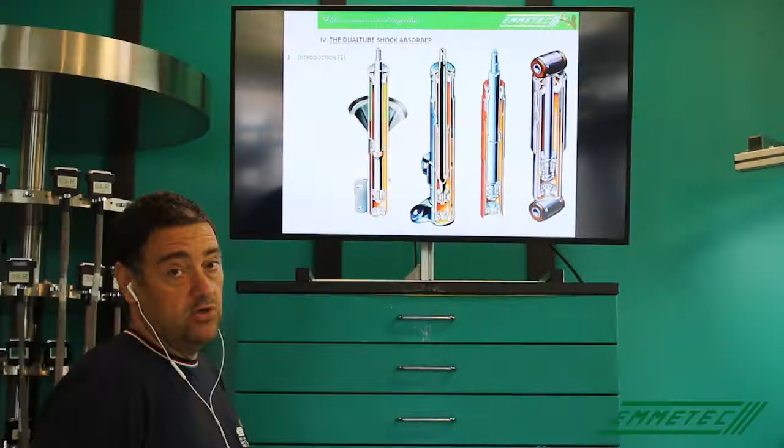The twin tube shock absorber is a shock absorber made with two coaxial tubes. It doesn't matter if it is a standard McPherson with standard stirrups, or a McPherson with non-conventional stirrups, or if it is a cartridge, or a conventional shock absorber. All of them are twin tube shock absorbers, because they are made with two tubes.

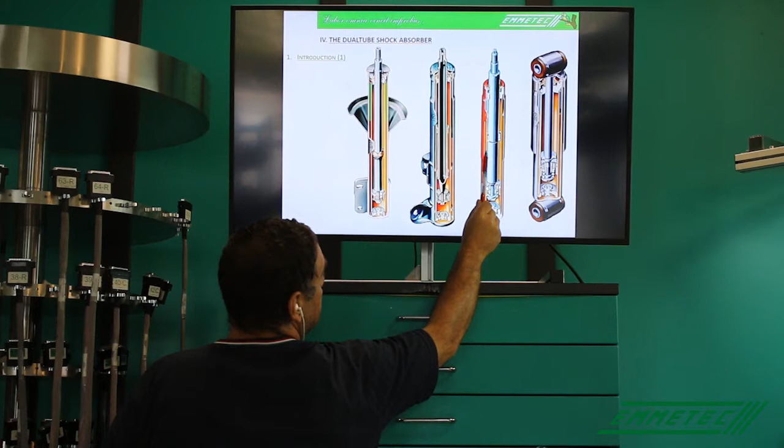The external tube we will call the body, this, or this, or this, or this. The internal tube we will call the cylinder, this - it's very thin, it's difficult to appreciate it - and this. Then we have the rod, okay?

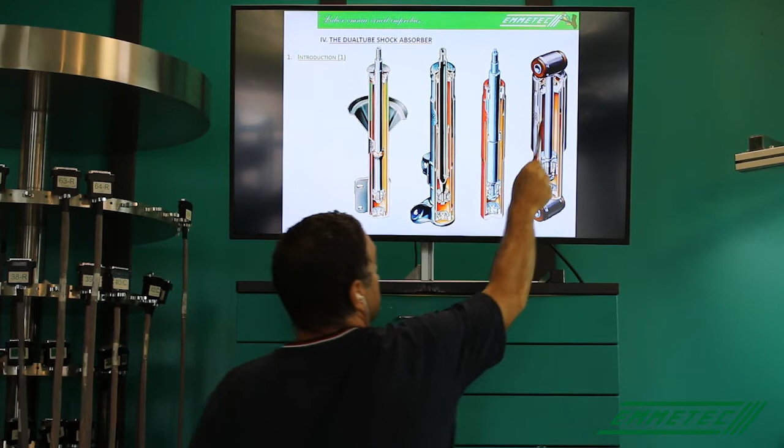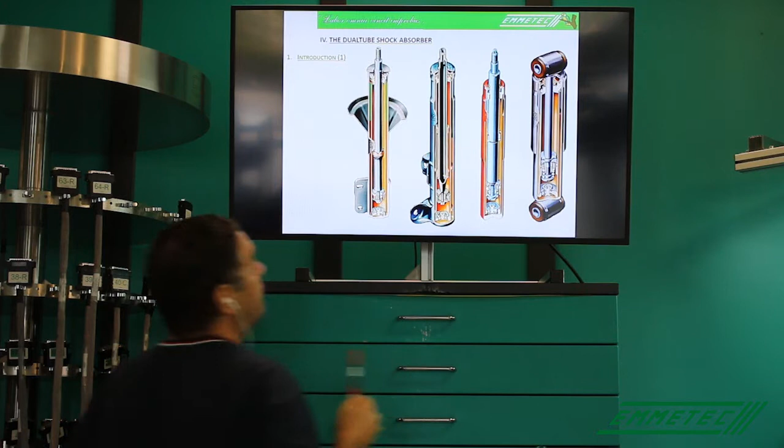This is a hollow or empty rod, the rod, the piston, including one valve. Then there is the guide. The function of the guide is to guide the rod along the cylinder, and to guide the cylinder along the body.

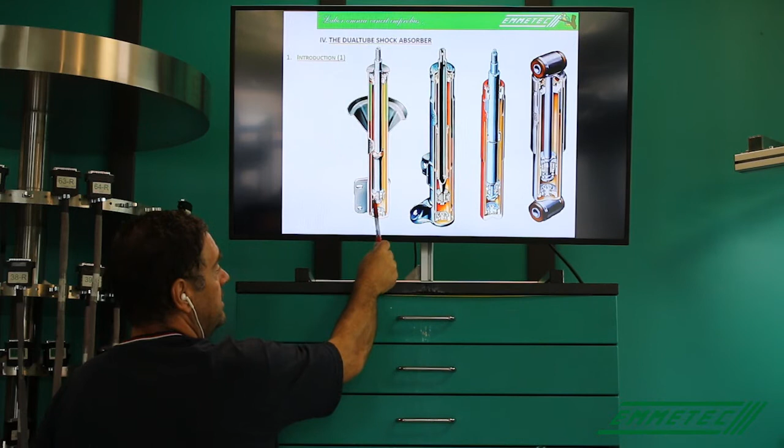Then there is the bottom valve. The bottom valve is another valve that connects the cylinder with the body. In all of them, we have oil and gas. The gas could be nitrogen or air, it doesn't matter. And the pressure of the gas could be 1 bar, the standard pressure, or more.

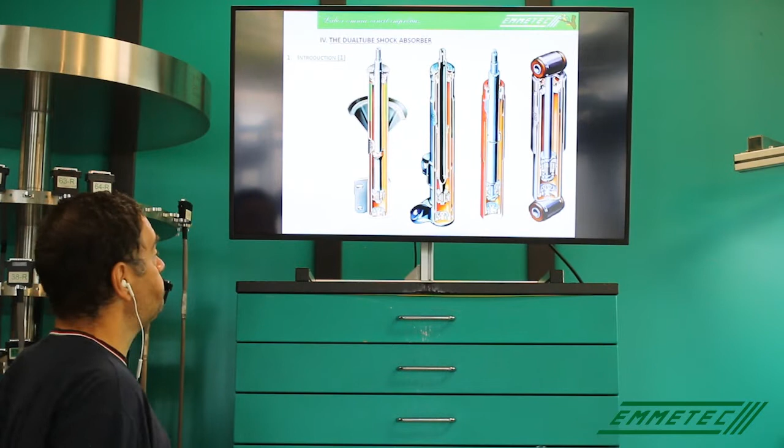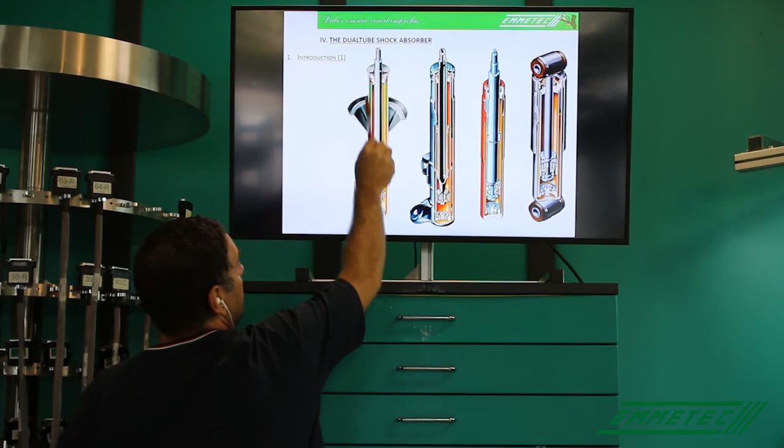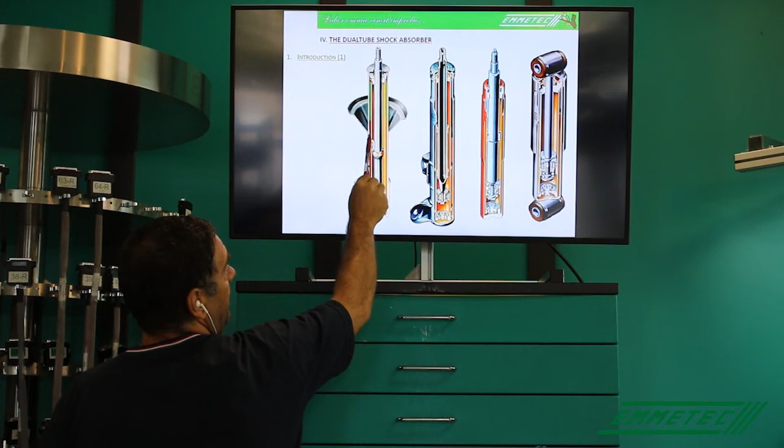In the proper and right conditions, the inner cylinder must be completely full of oil, above and under the piston, always full of oil. The chamber around the cylinder, into the body, must be full of oil to 50% or 3/4 of the body, with the rod in. I repeat, with the rod in, the outer cylinder must be full within half or 3/4 of the cylinder.

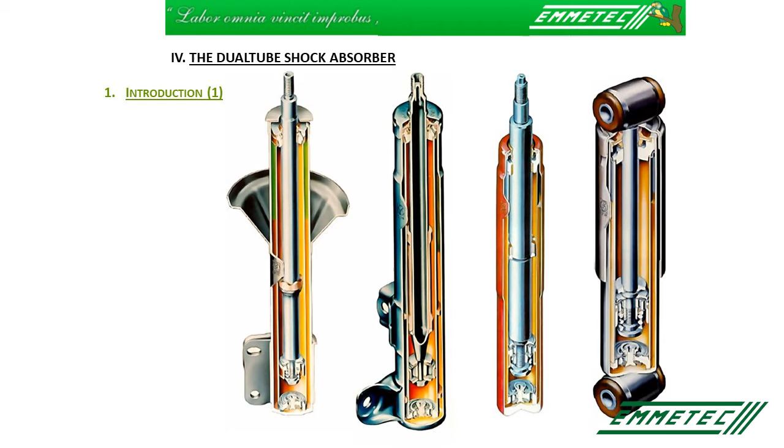It depends on how big the rod is in comparison with the diameter of the cylinder, but this is a detail we will see later with practice. So, how does a dual tube shock absorber work?

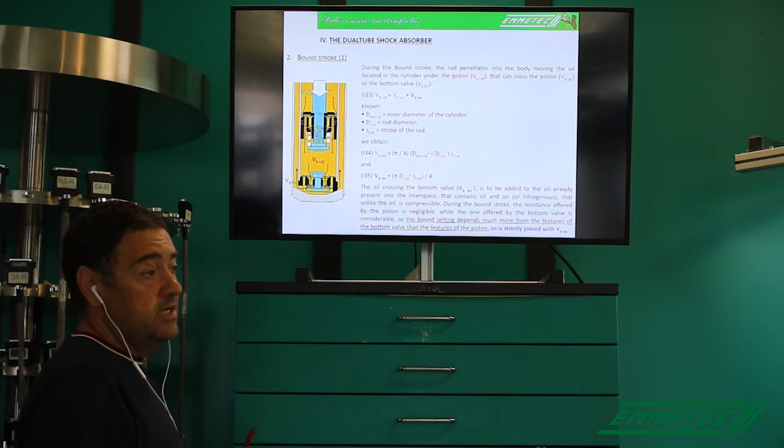Again, it's better to see in detail how the piston is made. It is very similar to a monotube piston, so we will have some holes. Holes are closed by shims. Shims could be preloaded because of the shape of the piston, or because of additional springs.

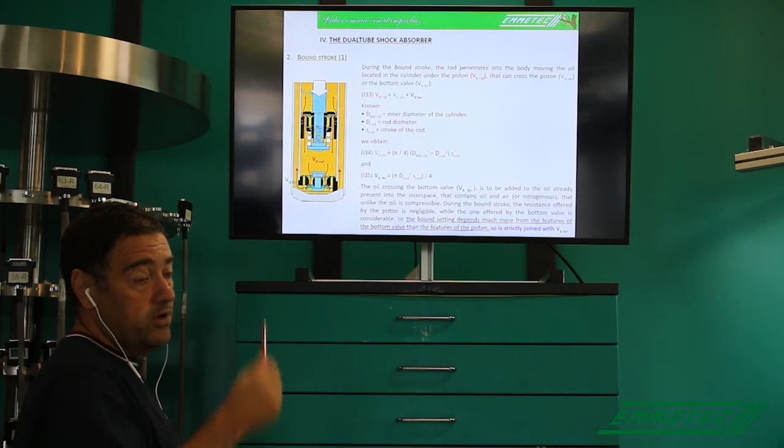Then the bottom valve is similar to the piston, so we will find certain holes working in rebound and compression, and these holes are closed with shims that could be preloaded. In both cases, we have bypass, shims, etc. Let's see how it works.

Suppose I press the rod in, so we are working in compression. I create a pressure in this area, and a vacuum - so a pressure between the piston and the bottom valve, and a vacuum between the piston and the guide. Because of the difference of pressure, the oil is forced to cross the piston and to cross the bottom valve.

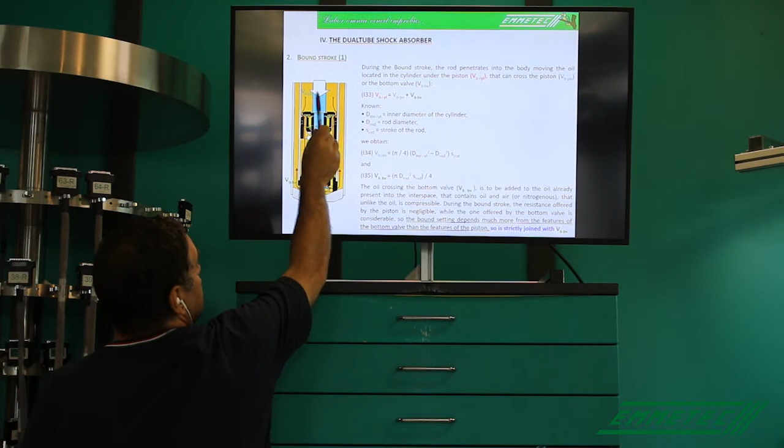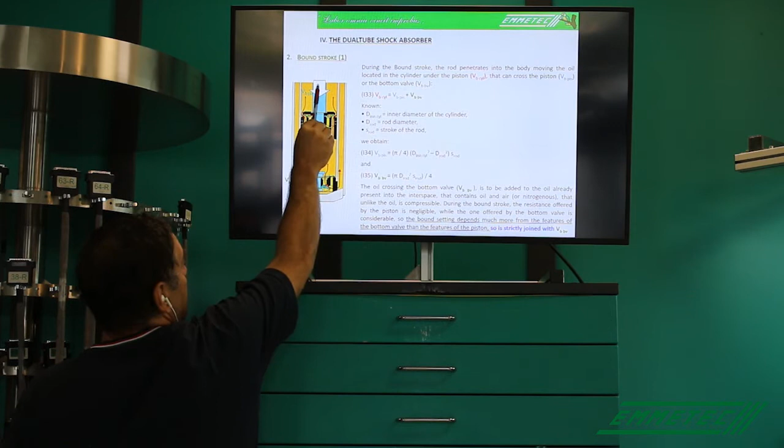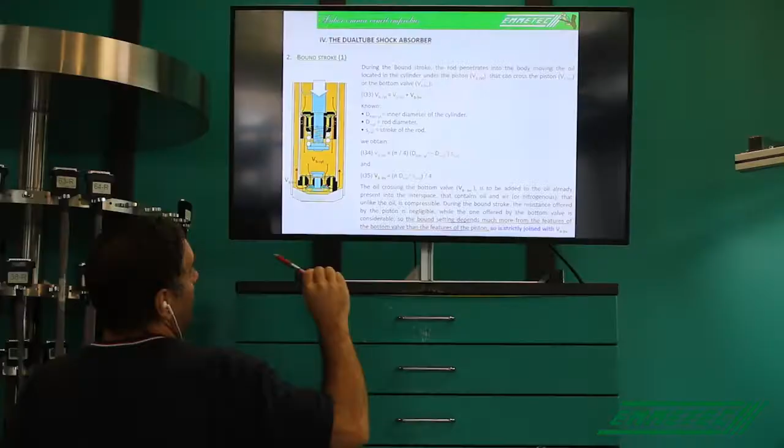As you can see, this volume is higher than this volume, because in this volume the rod is also included. So what happens is that an amount of oil equivalent to the volume of the rod that goes in crosses the bottom valve going into the chamber, while a volume of oil equivalent to this volume less the volume of the rod crosses the piston, okay?

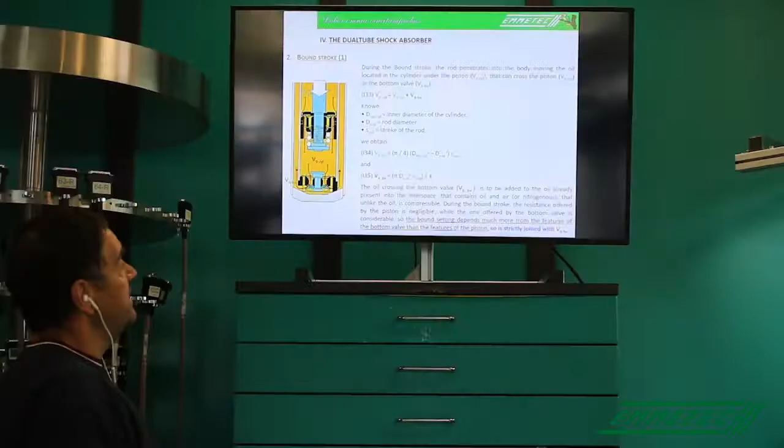The piston is crossed by oil in compression, as well as the bottom valve. So both are working in compression.

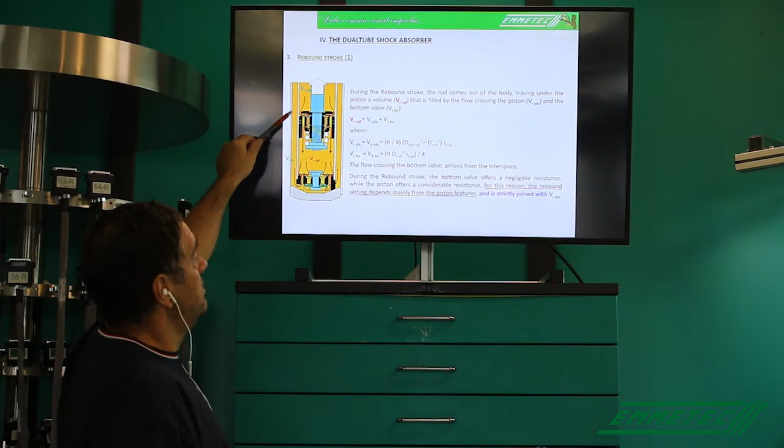During the rebound, I'm pulling out the rod, so I create a pressure between the guide and the piston, and a vacuum between the piston and the bottom valve. Because there is a difference of pressure, the oil is obliged to cross the piston and come here. For the same reason, the oil that is in the chamber crosses the bottom valve, coming here too.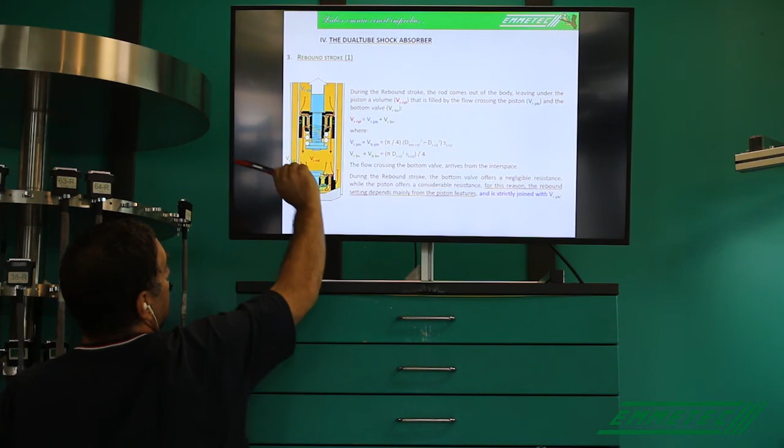So we can say that when the rod is pulled out, a volume of oil equivalent to the volume of the rod that left the shock absorber comes from the chamber, crosses the bottom valve, and comes here, while a volume equivalent to this volume - a volume of oil equivalent to this volume less the rod - is passing from the top to the bottom through the piston. So again, we see that the piston and bottom valve are working also in rebound.

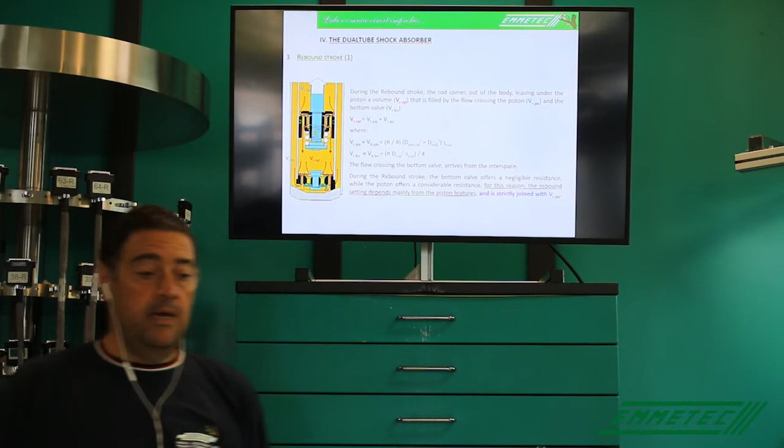Now, at this point, we have to tell the main rule, the golden rule of dual tube shock absorbers.

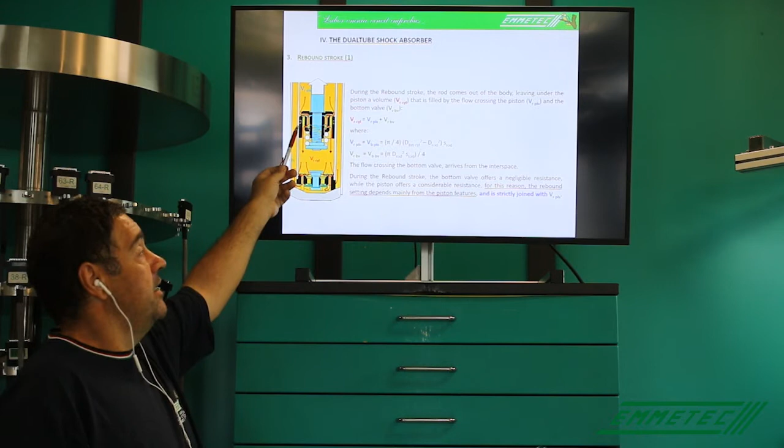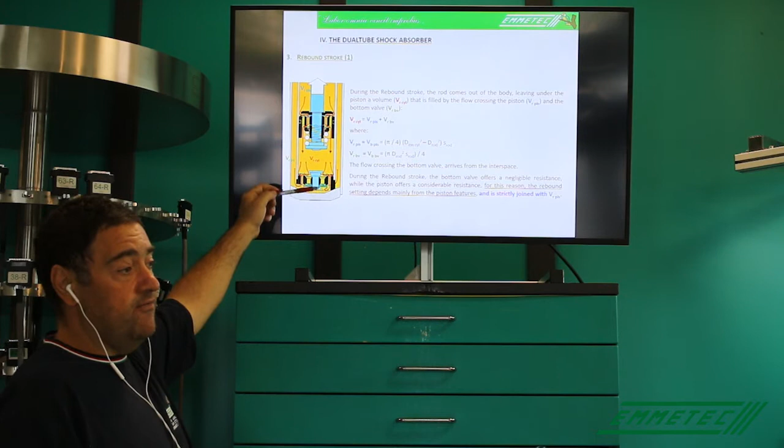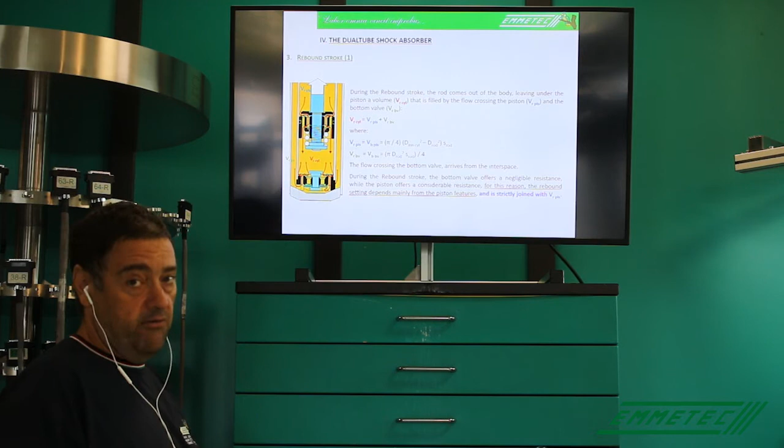The golden rule of twin tube shock absorbers is that the damping force of the piston in compression must always be lower than the damping force of the bottom valve in compression. I repeat it in the simplest way: in compression, the piston must be softer than the bottom valve. I repeat, the piston in compression must be softer than the bottom valve in compression, or vice versa - the bottom valve in compression must always be harder than the piston in compression. Why?

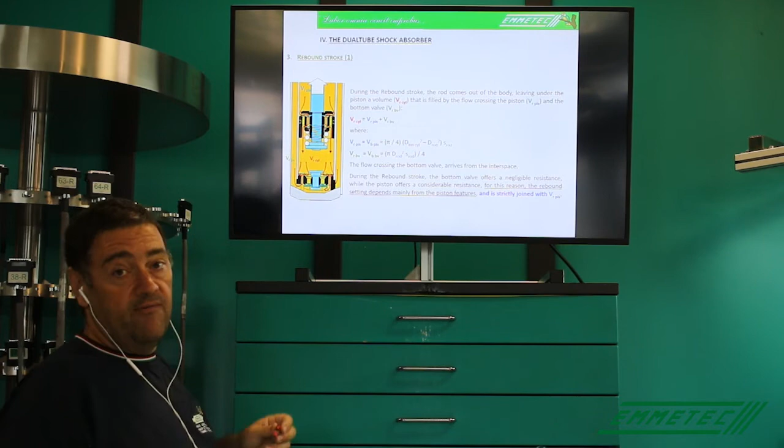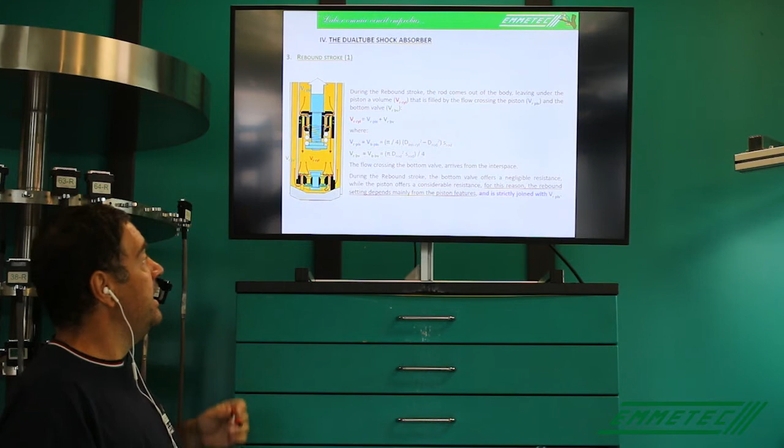Suppose that the shock absorber valves are adjusted to comply with the golden rule: here we have a big bypass and here a small bypass. Suppose that into the piston we have soft shims working in compression, and in the bottom valve hard shims working in compression, so our piston in compression is softer than the bottom valve in compression.

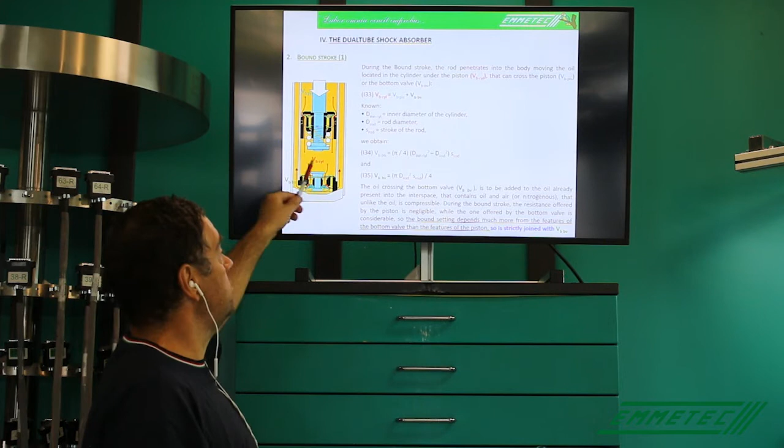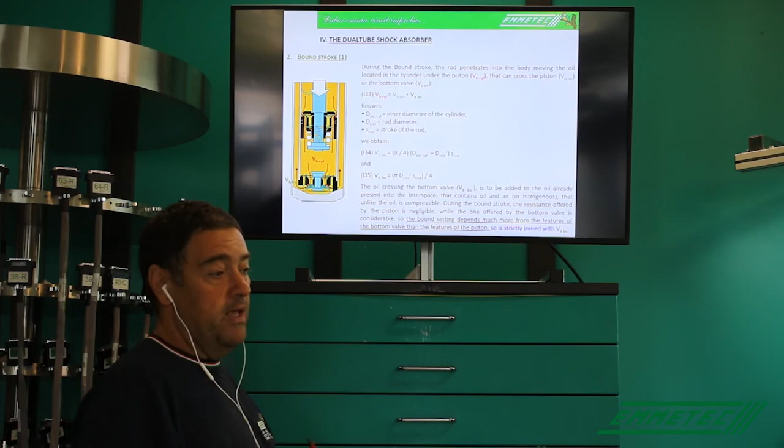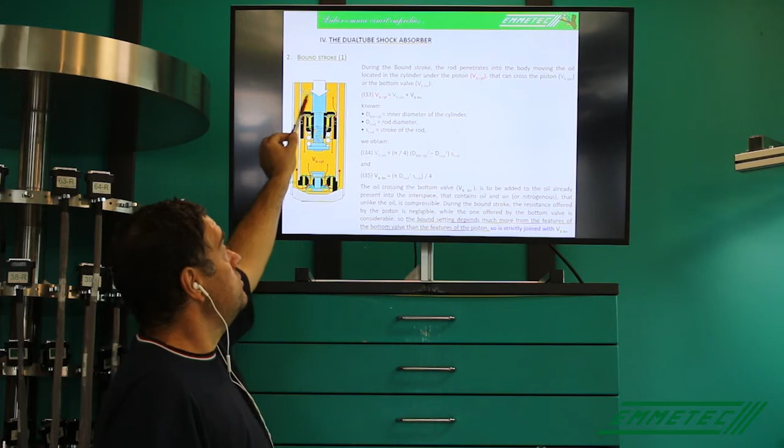Now suppose I push the rod in, so I work in compression. Working in compression, I create a pressure here, a vacuum here, so the oil is obliged to cross the piston and the bottom valve. We have to keep in mind that oil is a little lazy, and is always looking for the easiest way. If the piston is softer than the bottom valve, the oil will cross first the piston. Then once the chamber between the piston and the guide is completely full of oil, the oil will be forced to cross also the bottom valve. In this way, we are sure that the chamber between the piston and the guide is always full of oil.

And this is a big advantage, because in rebound, when we pull the rod out, for sure between the piston and the guide there will be oil — only oil, just oil. So it will work properly in rebound too.

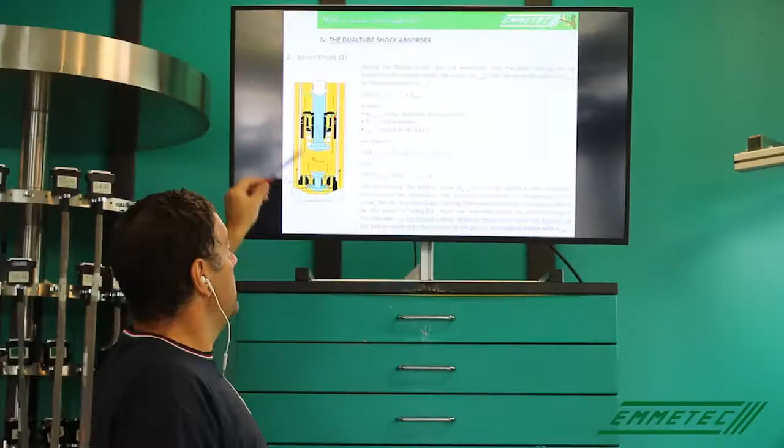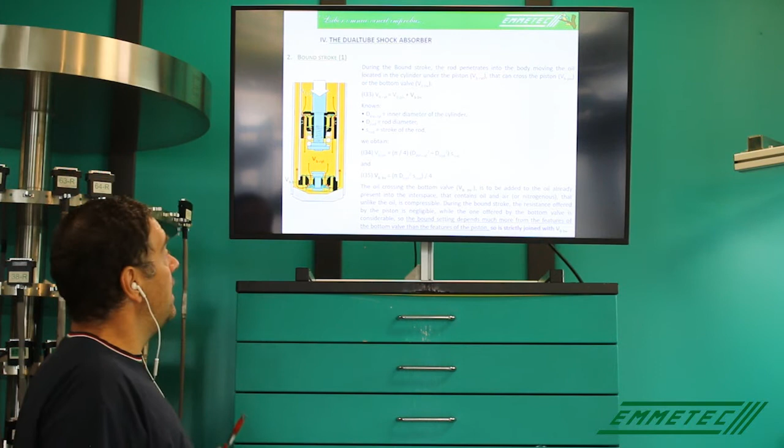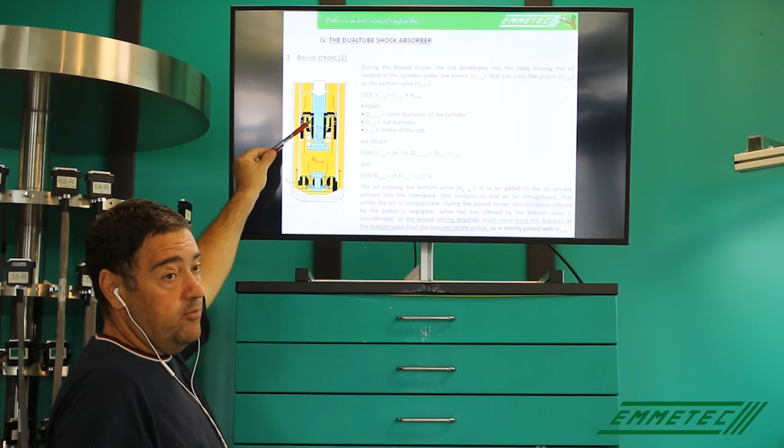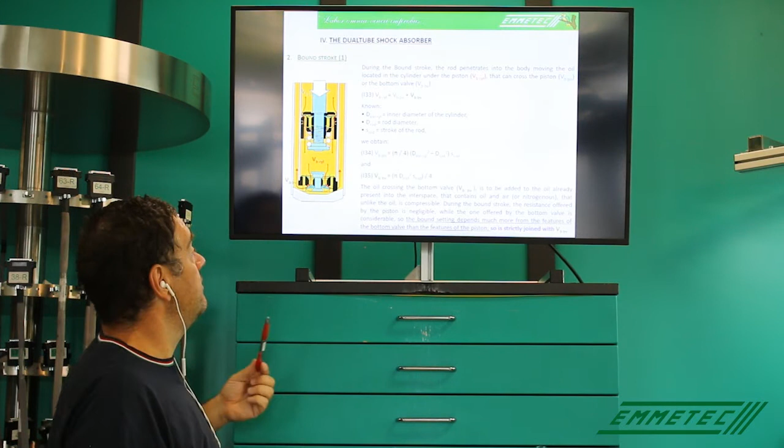Now suppose that for any reason the piston in compression is harder than the bottom valve in compression. What happens? In compression, when I push the rod in, the pressure obliges the oil to pass through the piston and the bottom valve. Remember the oil is lazy, so it will try to pass where it makes less effort. If the piston in compression is harder than the bottom valve in compression, the oil will pass through the bottom valve. Passing through the bottom valve, a vacuum will appear, and the cylinder above the piston will absorb air or gas from the top.

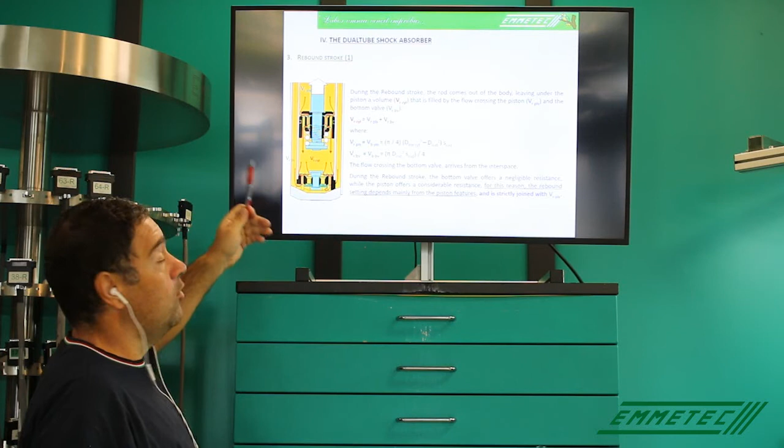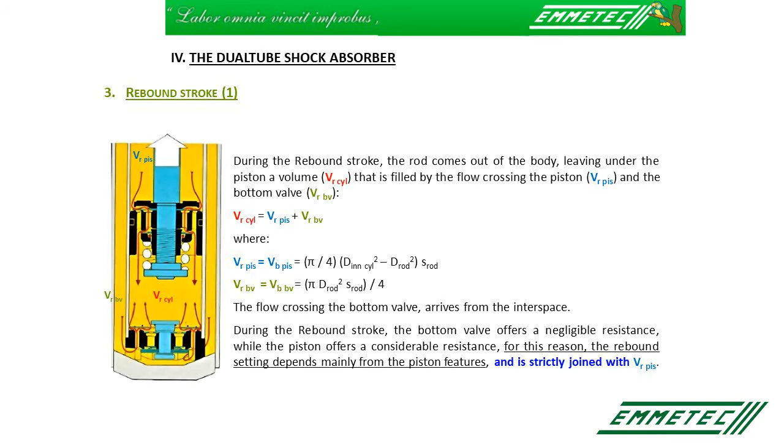It means that later, after the compression, when working in rebound, between the piston and the guide there will be first air, then oil, and the piston will be pulled up, compressing first air and then oil. Air creates no resistance, so we will have a shock absorber that in rebound offers no resistance.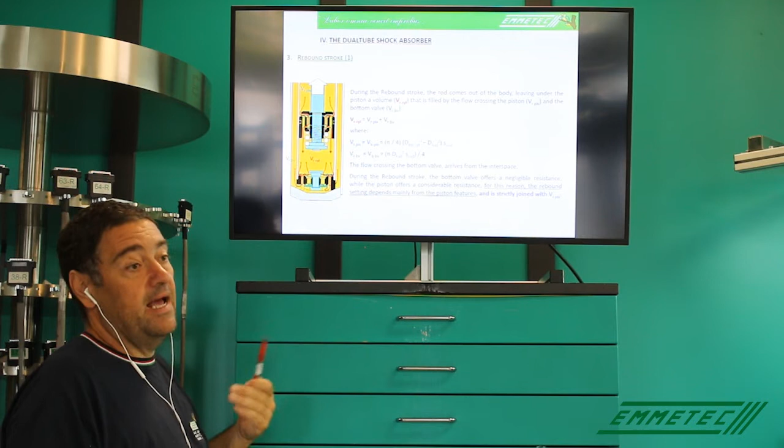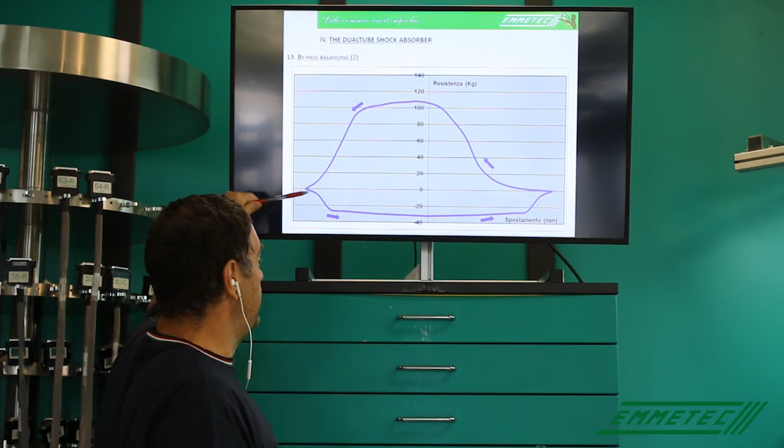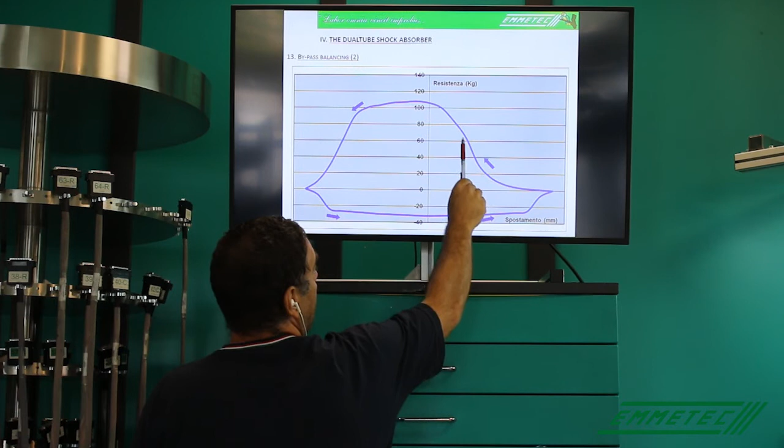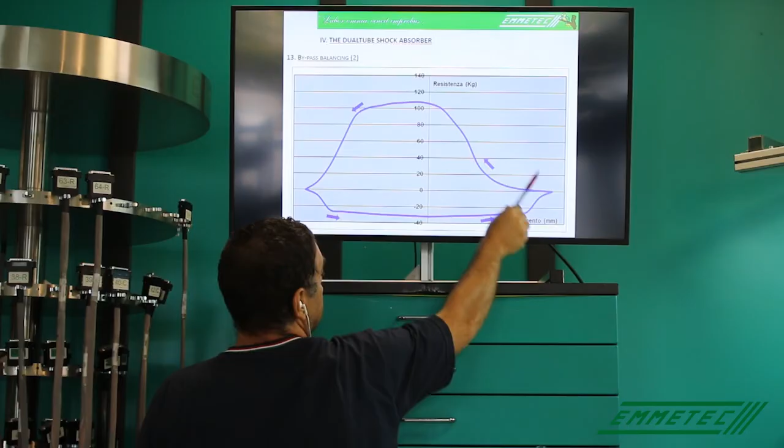Until the air between the piston and the guide escapes, and at this point it starts working. But what happens is that instead of having a nice diagram in compression and in rebound, we will have a diagram like this. So it works properly, or more or less properly, in compression, but later in rebound, because it's working by pressing the air, we see a bumping resistance. This means it's not offering resistance at first, so the shock absorber will be very soft in rebound.

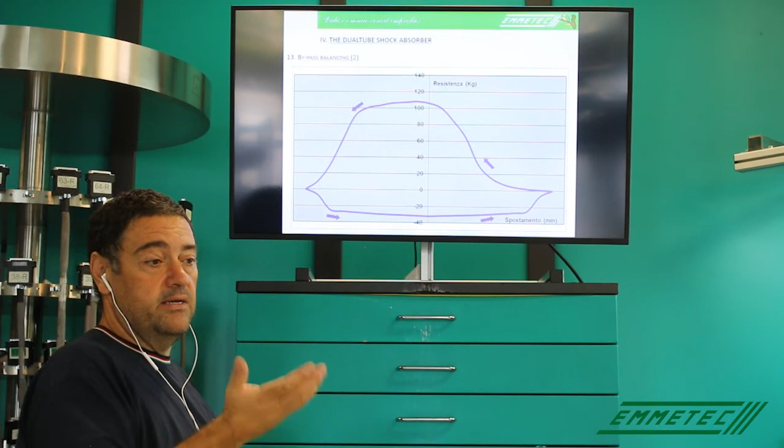But the second problem is that when we arrive here, the oil will shock against the guide between the piston and the guide, and there will be a shock, a vibration. And this will create noise. The vibration and noise will be transmitted to the car through the frame, amplified, and you will hear a knock, knock, knock — a metal noise. Your feeling will be that a bolt is not properly screwed, but it's not that — it's the oil shocking against the guide.

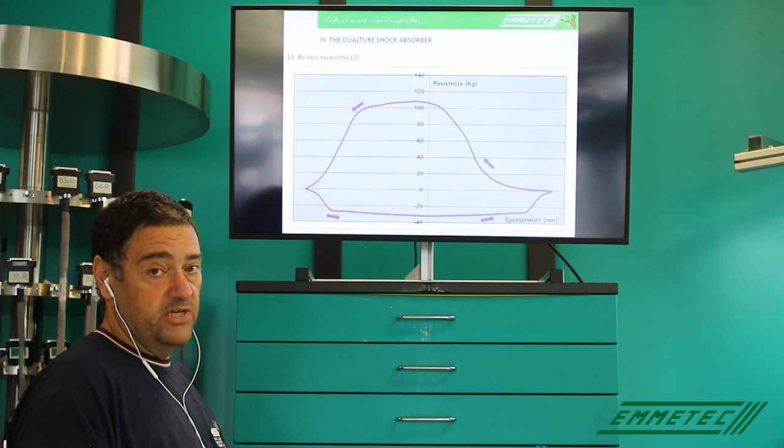For this reason, it's mandatory that the piston in compression must be softer than the bottom valve in compression.

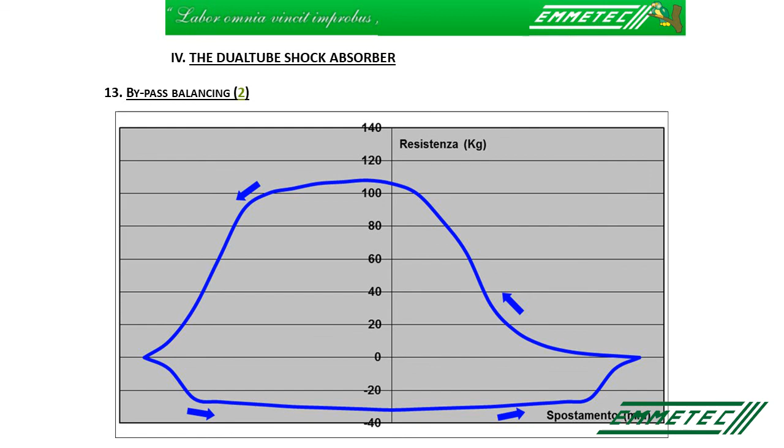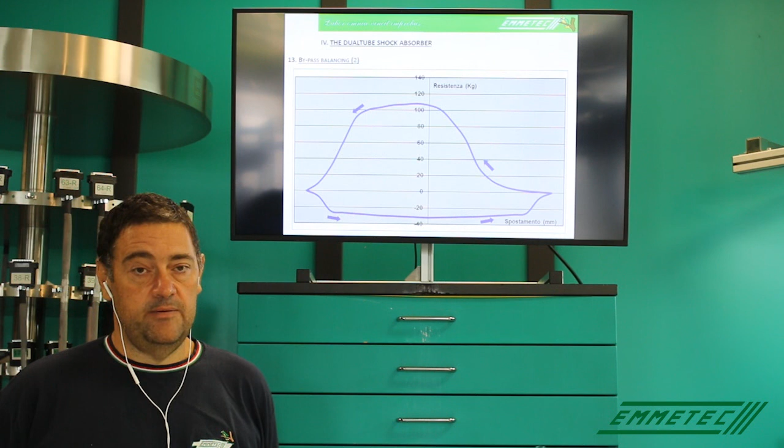Now, the question is: how is it possible, when doing a twin tube shock absorber, to understand if the piston in compression is softer than the bottom valve in compression? And in which cases can a mistake happen that creates troubles? This is the question we must always keep in mind. We will answer it later, after explaining in detail how the piston and bottom valve on dual tube shock absorbers work, because this way it will be easier to understand how the problem appears and how to solve it. Just one minute, please. Thank you.